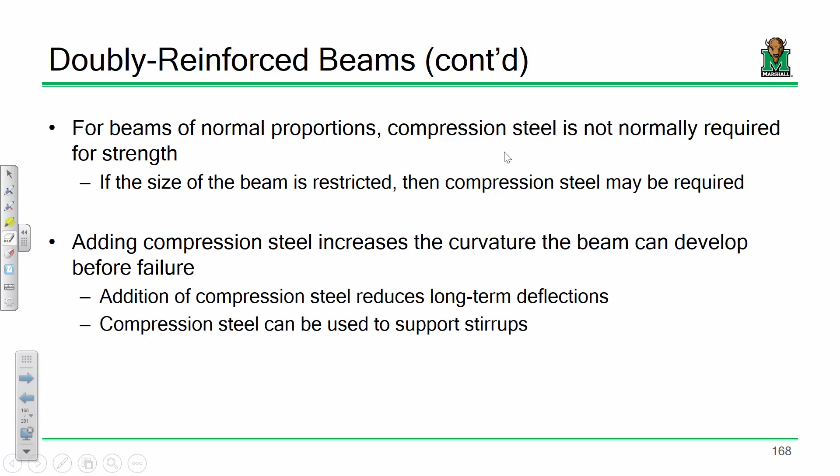You kind of need to know how to account for it when you're doing beam column analysis, which is something we'll do in April, near the end of the semester. Also, compression steel is usually there because you're tying together your rebar cage, so you usually have some rebar up top anyways. For now we conservatively neglect it, but if you want to account for it, you can. Since it's present, there's really nothing stopping you, but you got to do it correctly.

A couple things - and I say a couple things, we're going to talk about couples, force couples.

When we did T-beam analysis and looked at the capacity of a true T-beam, we basically split it up into two force couples. The capacity of a true T-beam is computed by taking the flange steel couple and the web steel couple and adding them together.

When we look at doubly reinforced beams, we're going to do something very similar. We're basically going to take the couple between the concrete and steel, and then the couple between the two layers of steel: the concrete and tensile steel, and the compression steel and tensile steel.

In terms of notation, whenever you're looking at a beam that has compression steel, you're going to see a lot of primes pop up. For instance, the area of steel, A sub S versus A sub S prime. Instead of D, we have D prime.

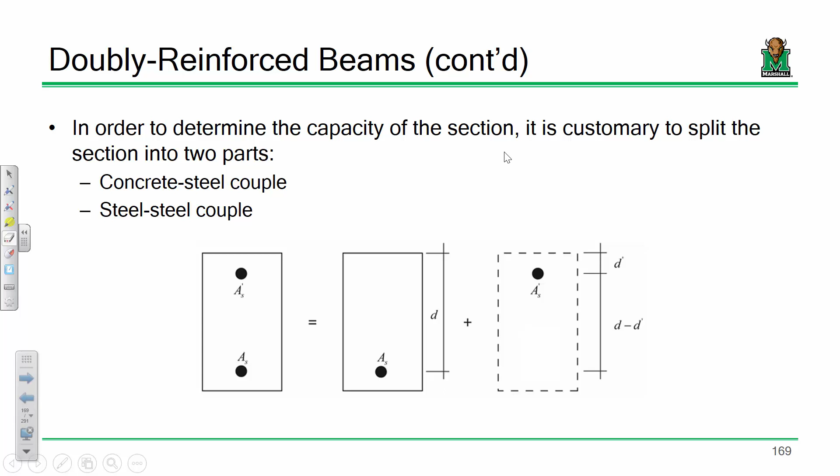Anytime you see a prime on there, that is referencing a dimension or quantity associated with compression steel. So here you see a layer of steel up top, that's AS prime, D prime. D is from the top to the tensile steel, D prime is from the top to the compression steel, and so on. Just make sure you're cognizant of the notation.

One of the challenging things about doubly reinforced beam analysis is determining whether or not the compression steel has yielded. For T-beams, the complicated issue was whether you had a rectangular T-beam or a true T-beam. For doubly reinforced sections, what makes it complicated is determining whether or not the compression steel has yielded.

Let's take our time with this. Let's look at a stress-strain curve. For analysis purposes, what we've done so far in this class is assume that our stress-strain curve for steel looks about like this: it's either linear up until Fy or it plateaus.

This slope is the Young's modulus for steel, which is 29,000 KSI. It plateaus up here at Fy, and there's that strain here, epsilon sub y, the yield strain. The yield strain is computed as Fy divided by ES. That's not a very big deal.

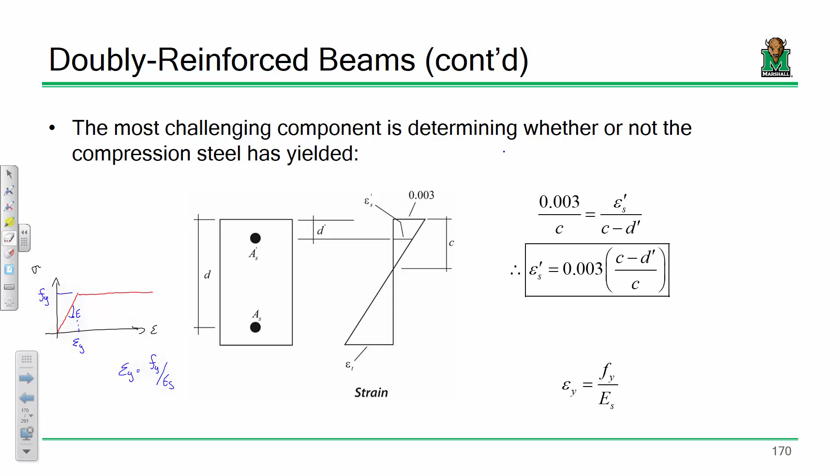Okay, now what we're going to do is this: if the compression steel has yielded, then that compressive force is simply the area of steel times Fy, same as we've been using before for the tensile steel, just AS prime Fy because we're talking about the force in compression. If not, then it's a little more intricate.

Let me go back to my stress-strain curve here. Okay, that's my stress-strain curve. This strain value right here is epsilon sub y, and this is Fy. Let's make up some numbers to make this make a little more sense.

Let's say this is 0.00207, which is normally the yield strain for 60 KSI steel. Now, let's make up some numbers: let's say that the strain in the compression steel is 0.003. If that's the case, what is the stress?

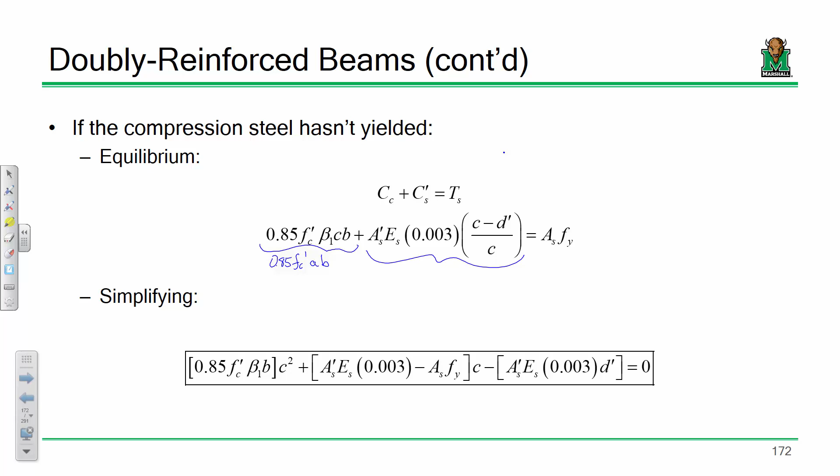Speaking of practice, let's look at a couple examples. I have two doubly reinforced beam examples. If you've been paying attention, one of these, the steel is going to yield. One of it, the steel isn't going to yield, you know, because I'm a pretty predictable guy. But I think you're gonna see how this is pretty straightforward.

Actually, the beams themselves are very similar. The dimensions are all the same. The only thing that changes is the rebar and some of the material parameters. But I think you'll see that this isn't so bad.

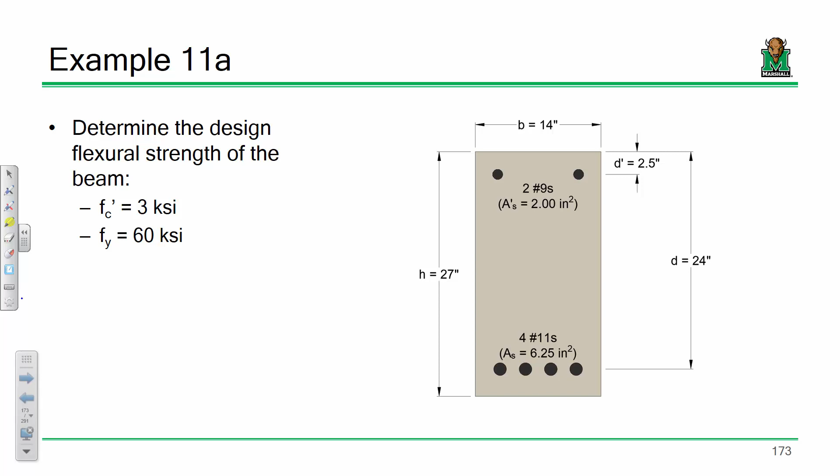Okay, so what I have here is I have a beam that is doubly reinforced. Now notice this, okay? Notice how I've got D from the top to the tensile steel is 24 inches, but D prime is from the top to the compression steel, and that's only 2.5, okay? So make sure you're understanding the difference in the dimensions. And notice how I've got an AS and an AS prime, 2 square inches for the compression steel and 6.25 square inches for the tensile steel. Just make sure that you're aware of that, okay?

I'm going to copy this onto my notebook over here. Oh goodness, every time. There's got to be a way of changing that setting, because... okay.

Example 11A. FC prime for this example is 3 KSI. What's beta 1? 0.85 — remember, it's 0.85 for anything less than or equal to 4 KSI. And FY is 60.

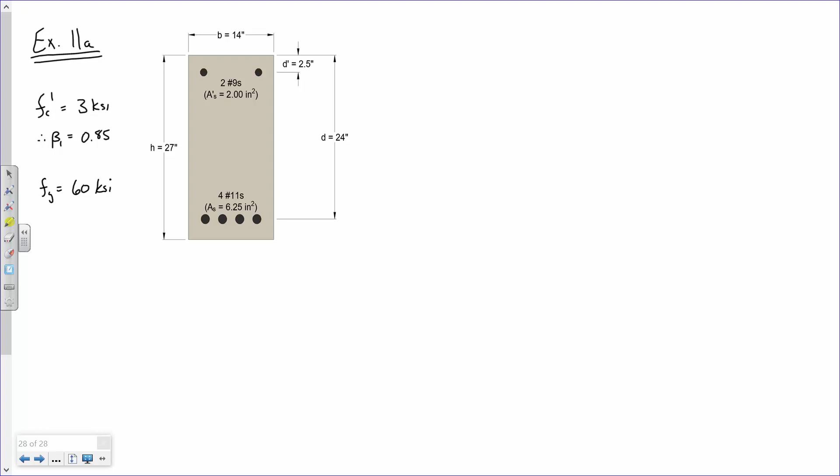Okay, now if FY is 60, whenever you're doing a doubly reinforced beam, the very first calculation you should do right off the bat, if you don't already have the value, is compute this — because this is going to be how you determine whether or not your assumptions are correct. Remember, write out those units. Take your pen or pencil, write that little K, that little S, and that little I. Write them out. So what are the units for this calculation going to be when it's all said and done? There are none.

There were some strains in PSI on the exam — I don't know where that's coming from, but you got to write it out. All right, what do we got here? Okay, so just keep that number in the back of your head, because we're going to refer to it here in a second.

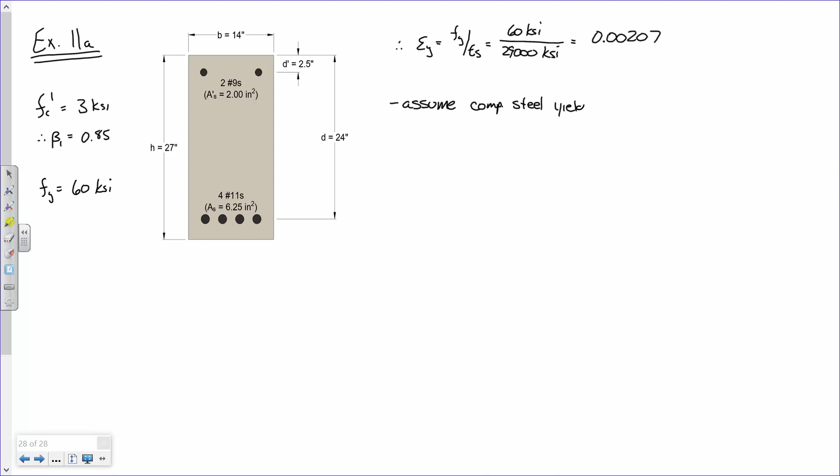So far, so good? Now, in order to do this analysis, we have to make a guess right off the bat. The guess I'm going to make is that the compression steel yields. I'm doing that because it's the simpler approach, but we're going to check that assumption here in a second. So let's assume compression steel yields — again, we have to check this, but you'll see us do that here in a second.

So compression equals tension, right? So our compressive force — in our example there are two compressive forces. There's a compressive force in the concrete plus a compressive force in the steel. That's got to equal whatever our tensile force is, okay? Sound good?

Good question. So anytime you see a prime, I'm talking about the steel up top. Anytime you don't see a prime, I'm talking about the steel at the bottom — that's a simple way of distinguishing which one you're talking about. So if you see a rho versus a rho prime, the rho prime is always talking about the compression steel. That's a good question. If you ever see a beam with pre-stressing elements in it, you'll always see like a sub P — a D sub P, a rho sub P, A sub PS — and it's talking about the area of your pre-stressing strand. It's just a simple way of keeping everything on track. So it's a good question.

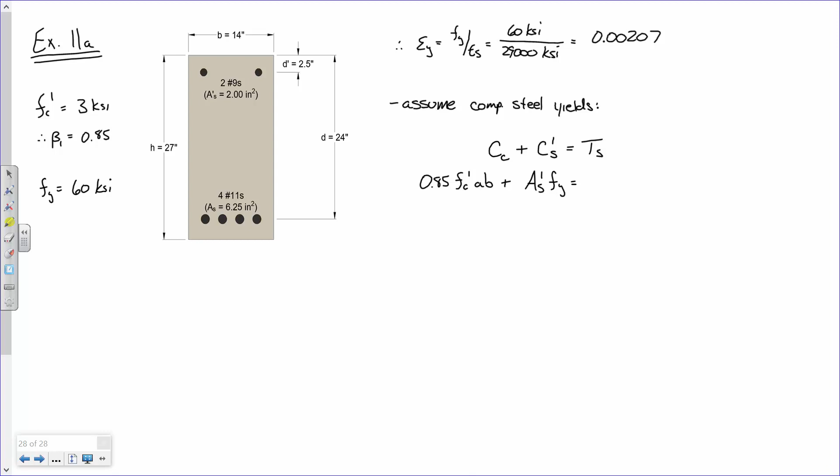So far, so good? All right, so let's go ahead and define these terms. For the concrete, what we're going to do is say 0.85 FC prime AB, plus, for the compressive steel, the area of steel times Fy. Now technically we are kind of doubling up on the area a bit, because in reality the area of concrete in compression would technically be whatever this shaded area is minus the area due to rebar. But because of the scale, it really doesn't affect things very much in the end for beams, so we sort of neglect it and just say 0.85 FC prime AB.

We do take that into account for columns, but that'll be a bit of a bigger discussion later because the reinforcement ratios are a little bigger. So we'll deal with that later on when we talk about columns. So we are sort of doubling up on our area, but no big deal. For tensile steel, we're saying area of steel times Fy. Did everybody understand what I meant when I said doubling up on area? Because if I say 0.85 FC prime AB, well, there's steel there, but there's not a lot of steel when you compare the whole size of that stress block. So it's pretty straightforward.

So far, so good? So let's make this simple. What do we need to solve for right now? A. So how do I do that? Take this, subtract it over, take that and divide, right? Notice how there's a common Fy. So what I'm going to do is this: I'm going to say A equals—

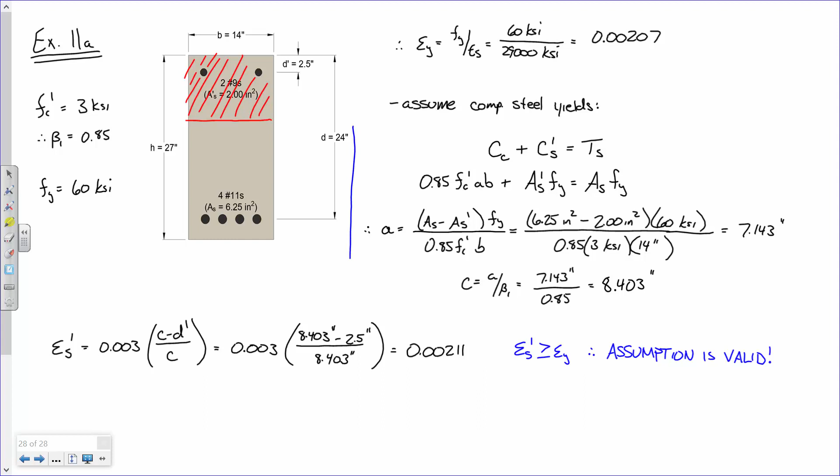All right. And while I'm at it, let me go ahead and box all of this. And I'm doing that because if it was invalid, everything in that box would be wrong. Well, I guess that would be right, but how we computed that would be all wrong.

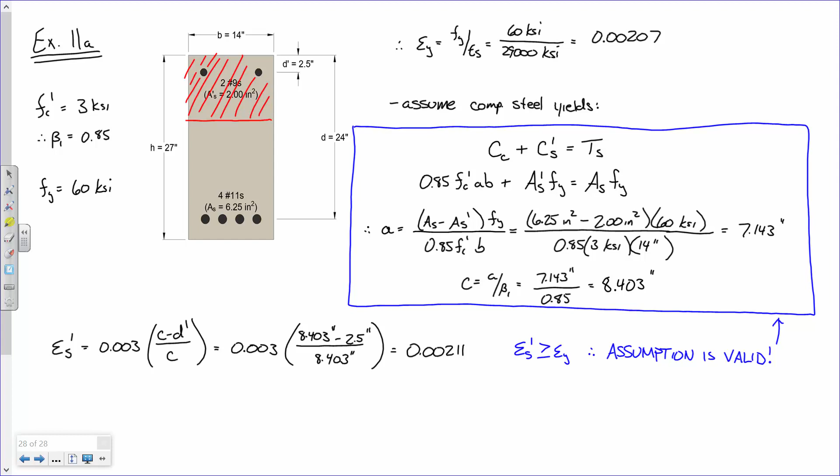Okay. Now, since I'm in a strain-happy mood, let's go ahead and compute the strain in the tensile steel, so 0.003. And here what we've got is D minus C over C. So the subtraction reverses because we're on the opposite side of our axis, and we're using D because we're looking at tensile steel, not compressive steel.

So 0.003, 24 inches minus 8.403, 8.403 is what?

Second on that? Tell me what that means. There's two observations we can make about that. So phi is 0.9 because it's greater than 0.005. And also, it's greater than 0.004, so it meets the minimum.

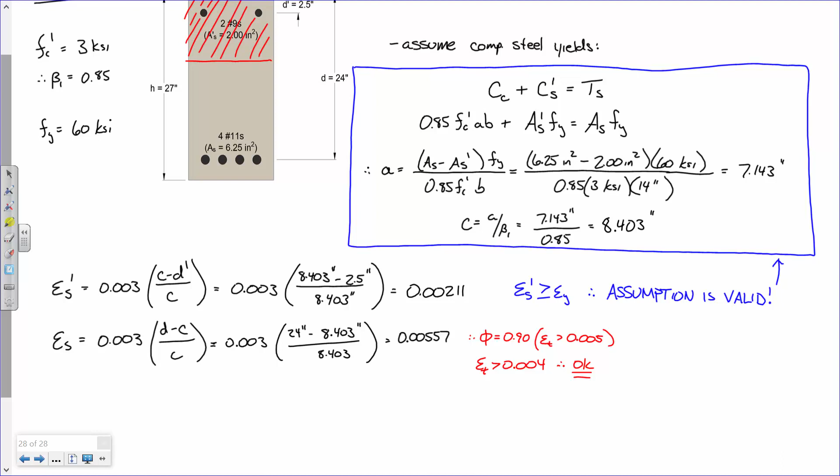So I got one thing I want to do. We're not going to finish the problem, but I got one thing I do want to check. And I want to check equilibrium.

How do I compute the compressive force in the concrete? It's 0.85 FC prime AB, right? So 0.85 times 3 KSI times what? And B is 14 inches. Now remember, A probably has a lot of decimals going after it.

Yeah, so basically like 255 kips. I have a second on that?

How do I compute the compressive force in the compressive steel? Area of steel times Fy. And remember, the only reason that we can use Fy here is because our assumption was valid.

So that's 2 square inches. Let me put that decimal point there. Oh, come on. I think I can do that one in my head and I get 120 kips.